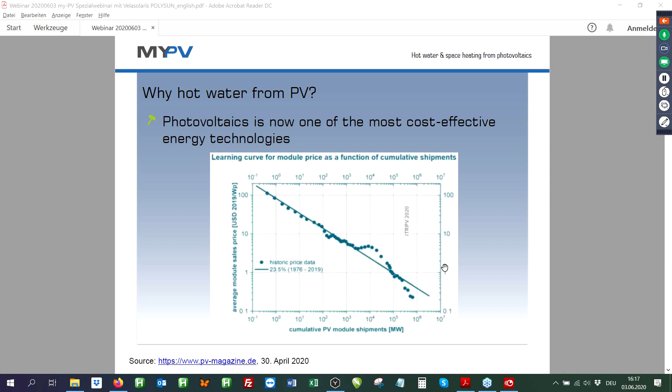What else? It's all about saving energy, storing energy, especially excess energy that would be fed into the grid. And here we are mainly talking about battery systems. They are all over the media. But for a single family home, a typical battery size means a storage capacity of, let's say, 5 kilowatt hours to 10 kilowatt hours. And this is quite a small capacity that has to be bought for much money.

As a cheaper alternative, we can use the excess power for hot water heating. For example, in a hot water tank with a volume of 300 liters, we have a much higher storage capacity.

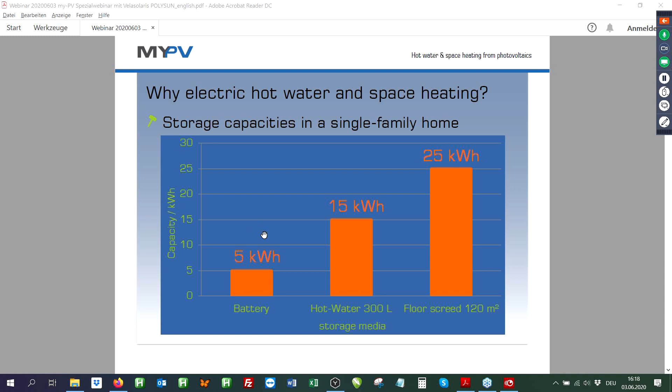So we can be a cheap alternative to batteries, but we do not compete with batteries at my-PV. We have a lot of very successful partnerships with battery manufacturers. And for this case, it is very important to know that if there is a battery in the system, the battery should have priority when you charge it. Because once you have done power to heat, and it is heat in the boiler, we cannot get electricity back out of it. That is clear, and that's why priority for the charging should be on the battery if there is a battery.

This is a rough overview of our portfolio, and today I would like to show you 3 models in POLYSUN. And I want to start with ELWA. As I mentioned, it is the only DC solution that we have at MyPV. It was our first product. It was invented in 2014. And still up to date, there have been hardly any changes on the device. The only problem that ELWA had was that this solution was definitely ahead of its time. But nowadays, this kind of application got into the people's minds, into the people's hearts, and it has become one of our flagships at MyPV.

And the principle is really the same as for a solar thermal system. We use all the energy from the roof, and we are using it for heat production in the boiler or in the storage tank. This does not matter. There is no inverter in between. All the PV power is used by this immersion heater. To ensure that this works efficiently, this power output, and this is the key know-how at MyPV, this power output of the heater is linearly power controlled. It can adjust its power output from 0 watts to 2000 watts. And above all, there's an MPP tracker integrated in the solution.

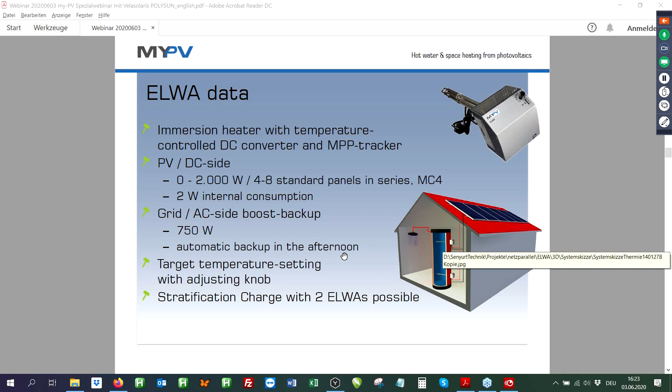And before we are seeing how we created the model in POLYSUN, here are a few more technical details. I already mentioned most of them. One special thing that is possible with ELWA, you can use two heaters in parallel on one and the same panel string, and you can adjust a lower priority for the heater on the bottom. And in doing so, you can ensure, even in very huge storage tanks, to have comfort, to have the required hot water temperature at the top very soon, and the rest of the energy can be used by the ELWA at the bottom. Practically speaking, it is also possible to use them in two separate boilers or tanks, no problem from my side. And enough of the technical details. We are now talking about the ELWA model in POLYSUN.

Andreas already mentioned it. There are a lot of different controllers available in POLYSUN, and the one that we are using is my favorite one. It's the programmable controller, because here all the logic, all the control strategies are in our hand. So with just this simple formula here, we can do the modeling of ELWA.

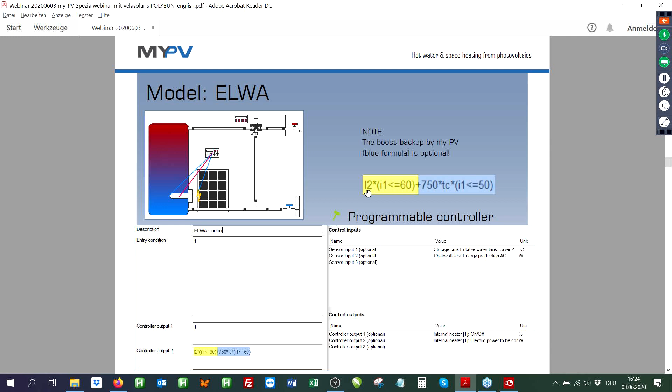And there are two main parts, the yellow highlighted one and the blue highlighted one. And only the yellow highlighted one is required to create a model which uses DC power for heating. I would like to show you this directly in POLYSUN. So there is a standard brick of the PV panel. So this also has an inverter here, but I choose to hide it.

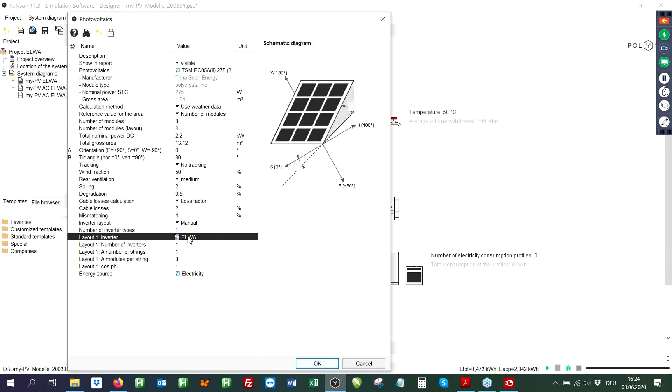Nevertheless, there is an inverter in this model, but this is our own defined inverter, which describes the properties of ELWA, basically the DC input voltage from 100 to 360 volts. So it's not a standard inverter that we are using, because on the real product there is no inverter. So I'm using a 300-liter tank in this model.

Of course, these components and the logic of this programmable controller can be used for every other tank that you want. You can also take our formula out of this controller and use it in another model that you are working on, no problem. But now let's see how the formula works.

It's really very easy. So the first part means: take all the power which is received from the PV panels and give this power to the immersion heater as long as the temperature in the tank is below 60 degrees centigrade. So this value here actually means the setting of the rotation knob. You remember the rotation knob here on ELWA.

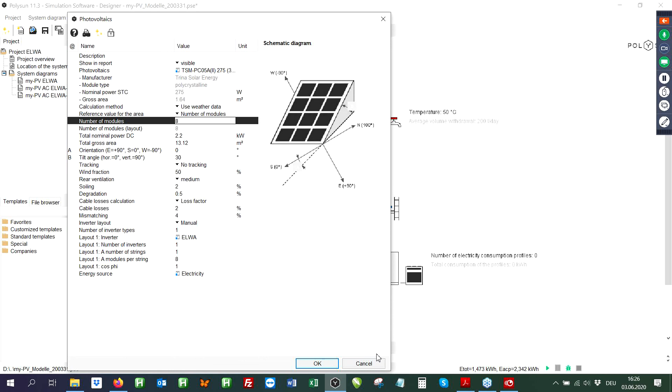Depending on the position of this rotation knob, we are setting this value here, and that's it. As long as it is not above 60 degrees centigrade, use all the PV power for heating. And this is it, no big deal. And I have adjusted 8 panels here, and this is how the system works.

In this model there is no other conventional backup heat source, and that's why I also use this optional backup with the mains plug, and I'm doing this with the second part of the formula, which means from 3 p.m. in the afternoon forward, use 750 watts as long as the temperature in the boiler is below 50 degrees centigrade.

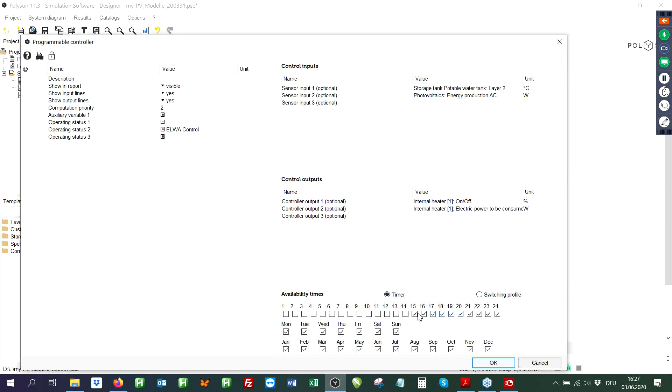Why 50? This is a factory preset from my-PV for the optional AC backup. You can change this with an infrared interface, but I would not go any further on the description of this. The factory preset is 50 degrees centigrade. And the AC backup starts in the afternoon, which actually can also be changed on the real product.

Now let's see what POLYSUN tells us about the performance. Please note I have electric consumers in here, but there is no profile in the background. This is just to get the results also for the electric consumers. So let's start the simulation for the first time, and POLYSUN is calculating. Very nice. And the two most important things to me can be found at electric consumers.

This is the degree of self-sufficiency, and usually this part describes how much electric energy for your building can be provided by the PV system. This works for all the AC models, but actually for the ELWA model this means a different thing.

This means the so-called solar coverage ratio, which means how much of my energy demand for hot water heating can be provided by the sun. The word is another one, but the definition and the value are still valid. So

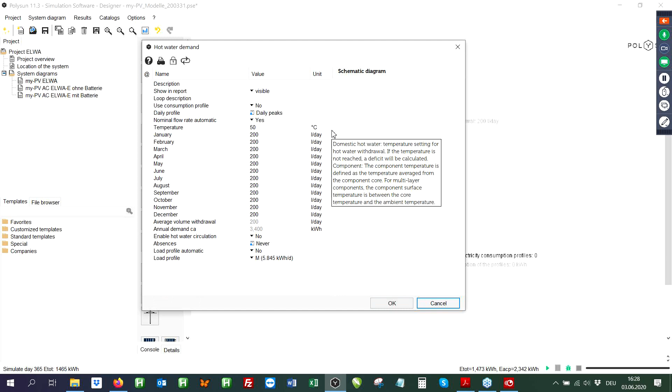54% of the annual energy demand for hot water heating can be provided by 8 panels, and the hot water demand that has been defined is the demand of 4 persons. So we are talking about a single family home here, and more than half of the energy can be provided by 8 PV panels.

And what else? The self-consumption fraction, which means how much energy can be used from the PV system directly in the building. So technically speaking, there is no way to feed into the power grid, but the POLYSUN model does not know. And what we are seeing here, the rest of 11.5%, is the energy from the PV panels that cannot be used for anything.

Why is that? Because during summertime we are on target temperature in the hot water boiler, and then the ELWA has to shut down, and then the PV power is not used for anything. But this is without all those disadvantages that we see during summertime on solar thermal systems.

But because of course there is no stagnation, there is no evaporation in a PV panel. It does not harm a PV panel at all when you create a short circuit on the... What is the English word for short circuit? I'm sorry, I missed it, but you know what I mean. You can connect plus to minus directly, and this does not harm the panel.

So a lot of advantages, and we are asked quite often, what happens to this rest of the energy? I cannot use it. Actually, you do not have to use it. This very little part that cannot be used for anything is so small, it would not be worth to spend money on an inverter for that. Yeah, so this is not the big deal here. So just less than 300 kilowatt hours a year cannot be used.

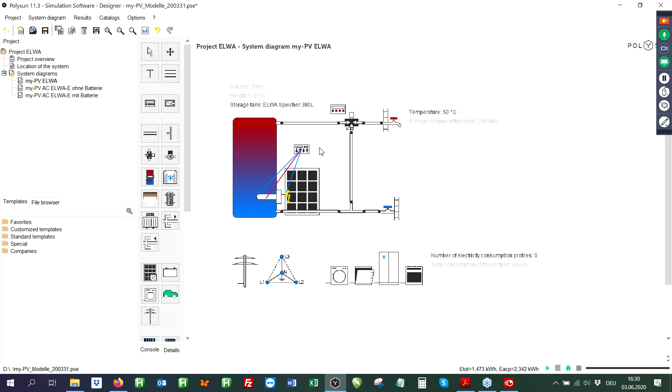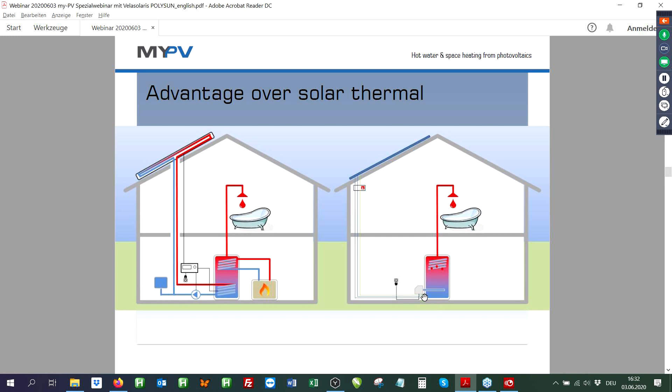So wires instead of pipes is one of our slogans, and PV power has become so cheap. We can also make it many times easier. Not only many times easier technically speaking, nowadays we are also making the system cheaper, and that's the key fact. It's so cheap we can think about using PV power even for heating.

And I would say this is quite a good time for our first break, Andreas, because this is the only DC product that I'm going to introduce today, the only DC solution we have. And before we start looking at the AC solution, maybe we should take a look on the questions, if there are already some questions. Yes. One question is regarding the maximum DC power input which would be suitable for ELWA.

What really matters is the DC input voltage. It has to be within a range of 100 to 360 volts. And it's no problem when you overpower ELWA with more than 2 kilowatt peak. You can also use more panels or more powerful panels, let's say a 330 watt peak panel, and you're using 8 of them serial. This is no problem as long as you are below this maximum input voltage. Why is that not a problem? Because ELWA is able to limit the current by itself. The current is always limited to 10 amps. The only danger for the product is a too high input voltage.

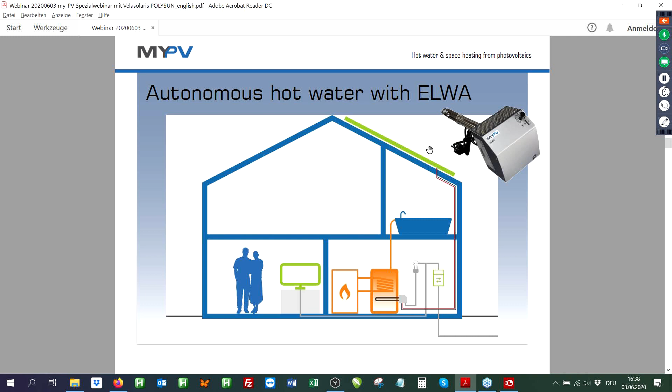And even on cold days, the PV system works more efficiently, while solar thermal system efficiency decreases. And one of my favorites is that also on cloudy days with low or without any direct sun radiation, this system operates and provides hot water, while a solar thermal system on the same day would not do anything. So this is one of the greatest technical features when we compare those systems.

Okay. Well, regarding the payback time and all this, maybe we will really reply by email, because obviously we need to do a comparison. Or maybe you want to say something about that as well. But in any case, I would say that we could do that later.

One very simple question, which goes in the commercial direction: is the product available in North America? Not yet, unfortunately. We can send it to North America, but we do not have the certifications for North America so far. And it's not due to the fact that North America has a 60 Hertz power grid. The ELWA would be able to work even in 60 Hertz power grids, as would the AC backup. This is a question of permission and certification, but we have not taken the step to North America so far. Unfortunately, I'm sorry.

Okay. So thank you for these explanations. I would suggest that we then proceed with the AC systems. Very well. So we are talking about on-grid systems now. These systems usually have more than just 8 panels. I'm talking about 5, 8, 10, or 20 kilowatt peak systems, whatever, it does not matter. And of course there is an inverter. The AC power from the inverter usually supplies the electric appliances in the building with priority. So the light, the devices, and so on.

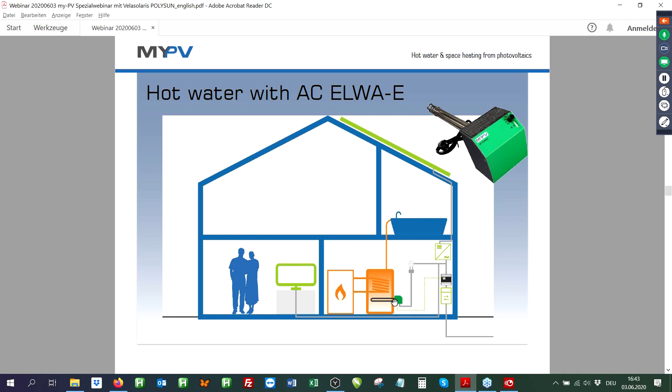The dimensions of the heater are exactly the same as for the DC solution. So this cover here is quite small, I have not mentioned that before. It's approximately 13 times 15 centimeters, and the heating elements are 45 centimeters long, 1.5 inch standard connection thread. And for the excess power detection, there's the power meter from my-PV as an accessory part. And here we also have the technical data on AC ELWA-E.

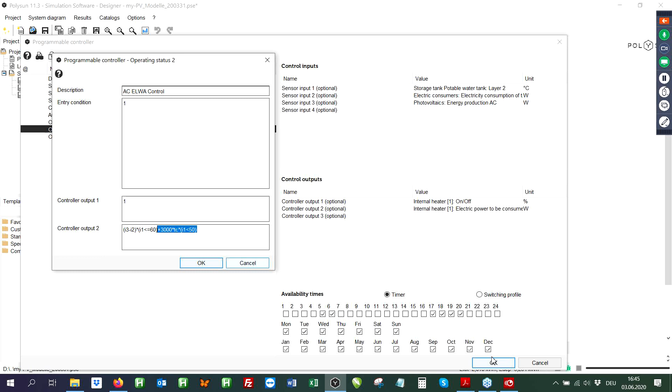But this is also only activated during time frames, set on the web interface of the heater. You know, it is connected to the router, and of course you have Ethernet access to the heater. And on this web interface you can adjust 2 time frames for AC backup. And again, if you do not want to use the AC backup, just remove this part of the formula. And this is, by the way, the factory preset. So when you take AC ELWA-E out of the box, it only uses excess energy and not the backup part. I'm keeping this backup part now in the formula to show what happens.

The brick of the PV is now a little bigger. I have adjusted a 5 kilowatt peak system in this model, and of course there is now also a profile of the electric appliances. This is a difference to the ELWA system. There was no consumption of the electric appliances. Now we are on the grid. We have to use power from the PV for the electric appliances with priority, and just want to take the energy that would be fed into the grid. So let's take a look at the results.

And I like this detailed view of the component results so much, because POLYSUN allows to copy all those results, and you can use it for Microsoft Excel or whatever. This is really a great thing here.

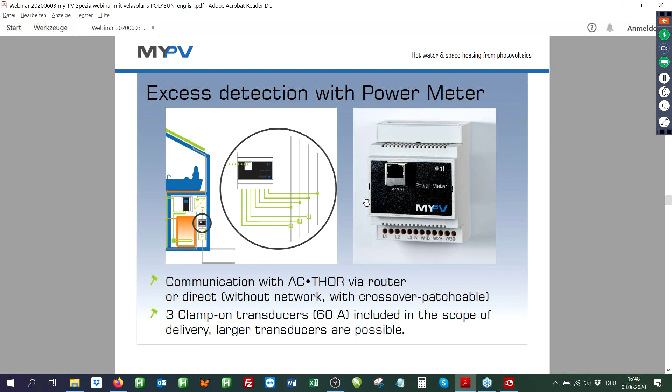And this can be a cheap alternative to battery systems, of course, but we do not compete with batteries, and that's why we are talking about compatibility now. I already mentioned there is a huge number of inverter manufacturers, battery manufacturers and smart home systems who are already able to control the AC ELWA-E. And if you have one of those signal sources available, it's not necessary to use the MyPV power meter. It's not necessary to use our accessory part then, because the excess power information is provided by one of those.

And let's keep a few more minutes on the topic of self-consumption. There is this diagram from the Technical University in Berlin. For a single family home, this diagram shows a self-consumption ratio of 30%, while we are talking about a self-consumption ratio of 2/3, 66%, when we are installing a battery. And power to heat with a MyPV solution can raise the self-consumption ratio even higher to 80%, for example.

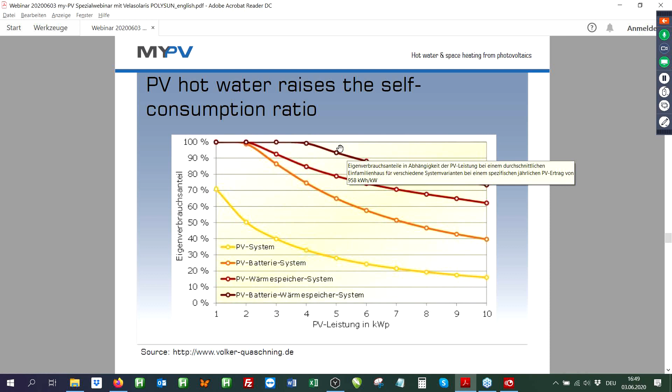And if you combine both technologies together, we have on average a self-consumption ratio of more than 90% in this example. And this is what we are talking about now. If there is a battery, the battery should have priority, because once it is heat in the hot water boiler, you cannot get electricity back out of it. That's clear. So power to heat is always the last application before you feed into the power grid.

Then the formula has a green part, and this green part also considers the state of charge of the battery, which means that only if the state of charge of the battery is higher than 98%, then we would use excess power for heating, and we will not start earlier.

And one very important thing, if you use this blue part, this optional AC backup, you will lose all the advantages of the battery. Why is that? Because in the evening, when there was not enough PV power available to do the hot water heating, and the optional boost backup starts, AC ELWA-E will take the energy from the battery, which means you're just moving energy from the green area to the red area, which immediately destroys all the battery advantages.

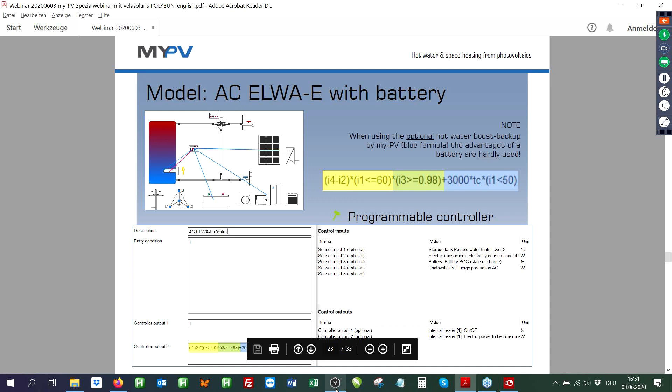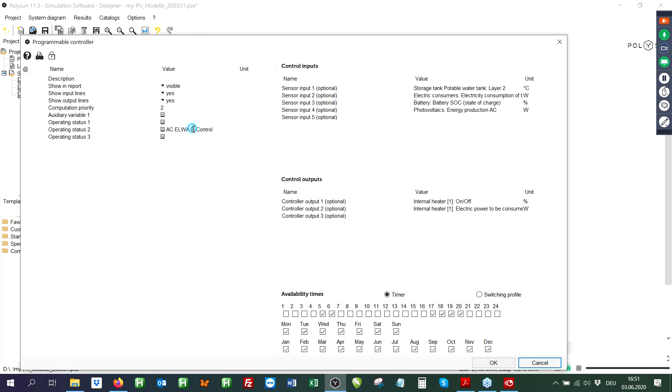Nevertheless, it's up to you, up to the planners, how you use those systems. You have these components available. You have the models available at POLYSUN. And here we have now also the battery, and the state of charge of the battery is considered here. For my hydraulic model, there is no thermal backup source. So that's why I'm still using this formula part of the optional boost backup. Otherwise we would have an error message that there is not enough hot water.

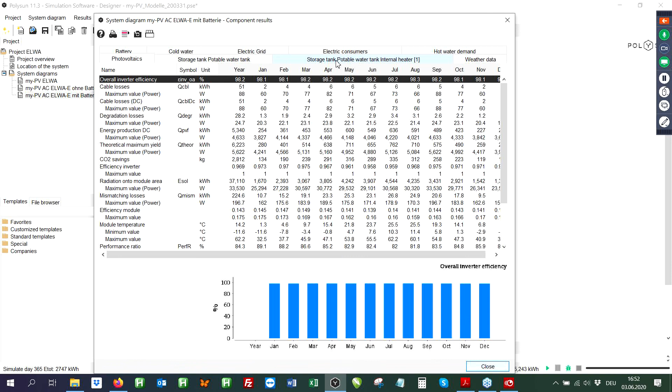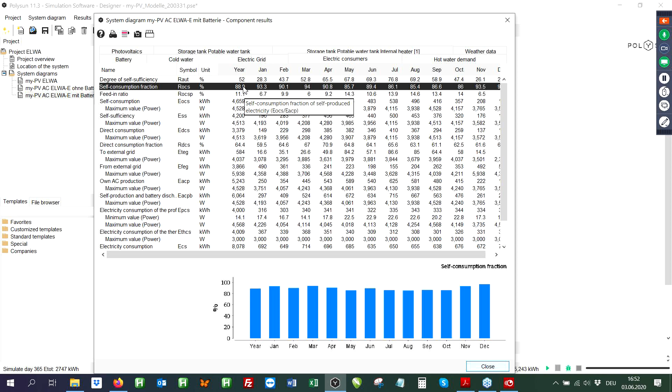But I want to show you what is possible when we combine both technologies together. And here we see a maximum self-consumption ratio for electric consumers of nearly 90% in this example. So from my point of view, power to heat is a key part for the transition to renewable energies, even when there is a battery in the system.

Because let's imagine in a few years when I'm looking out of my window and I see my neighborhood, all of the buildings, or hopefully most of them, will have a PV system on the roof, and most of those PV systems will be equipped with a battery as well. But what happens at 11 a.m. when all the batteries are fully charged? I would like to tell you the grid operator will shut down the PV systems. That's a fact, because he has to do so. He has to save his power grid.

The power grid is not able to transport all of this excess energy from all those PV systems. So the PV system has to shut down. I can understand this from a technical perspective, but it is an absolute disaster for the transition to renewable energies. Because what happens in the evening when we need hot water for showering?

Are we starting our gas boiler then, or what are we going to do? Or will we be clever enough to use this excess power for power to heat applications? These are some deeper thoughts at this point, which are very important to me. And we have now finished all the three models.

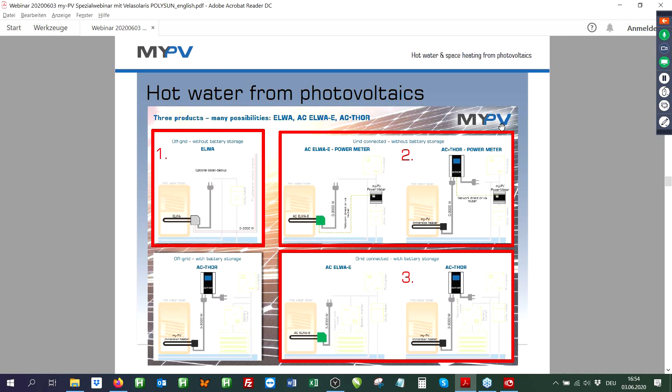Then we can use another product, and this is the AC THOR. The AC THOR is not a smart home system; with this color touch display, many people are reminded of a smart home system, but it's not. It's an AC power controller, and with this AC power controller you can make a standard electric heater PV ready in terms of linear power control.

So imagine the green AC ELWA-E, but instead of the immersion heater we have a mains socket on the device, and this is available in a single phase variant for a power control of 0 to 3 kilowatts maximum. But it is also available as a 3-phase variant with a maximum power output of 9 kilowatts. So it's very compact. A 9 kilowatt power controller that is so small is really very unique on the market.

And by the way, there are a lot of unique sales points for this product. One of them is the size. Another one is the color touch display. The third one is the communication. We are open for third-party control, and I give the communication protocol of this interface to everyone who wants to work with the device. Of course, the excess power information can also be detected by the my-PV power meter.

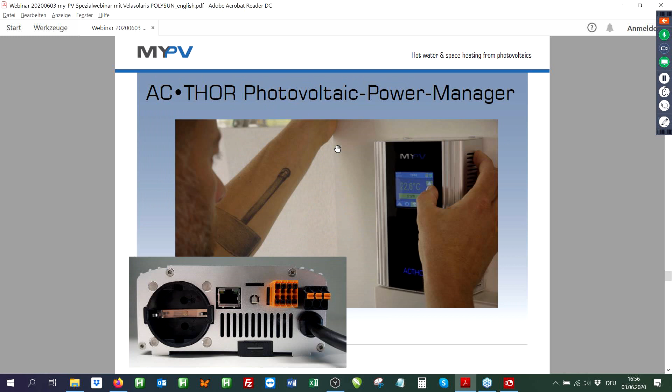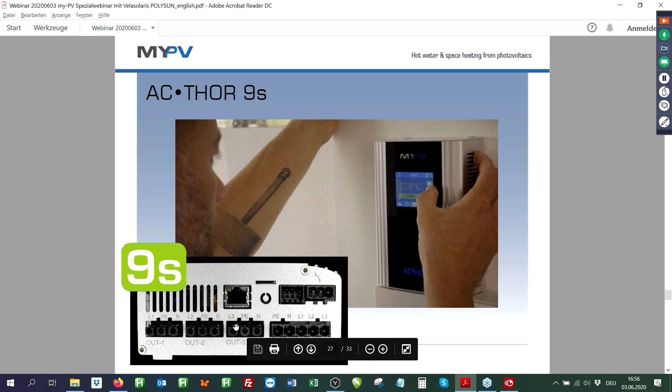So we have the same compatibility options as for the AC ELWA-E, and here are most of them. Inverter manufacturers, battery manufacturers, and smart home systems can also control the AC THOR in the single phase and in the three-phase variant. What else is great on the AC THOR 9s, as we call the 9 kilowatt version? All three outputs are controllable. Not at the same time, but we can do the linear power control either on output 1, output 2 or output 3, and altogether the maximum power output is 9,000 watts.

What else? The kind of power control that we are using in all our products is the same power control as used by PV inverters. We do not use thyristors. We do not have the so-called phase angle control, which is very important for the grid operators, not only in Switzerland but also in Austria and Germany. This topic becomes more and more important, and with a my-PV product you can rely on a high quality solution. So it works as a PV inverter.

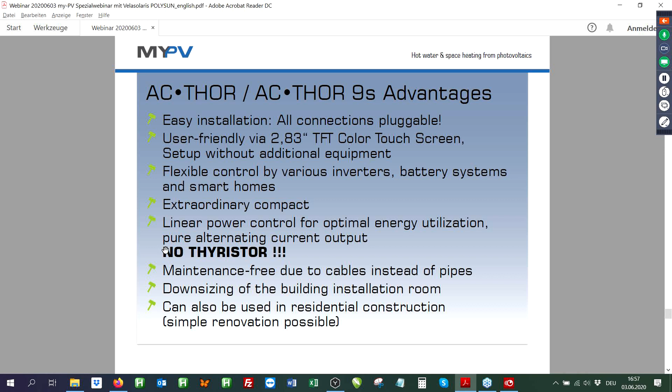Where to buy? On our website you can find the information on our distributors and wholesalers worldwide. As a manufacturer, we are not selling to private persons, but we have a very well developed distribution network in many countries. Detailed information is of course available anytime in the download section on our website. Not only the manuals and wiring diagrams, but also the recordings of webinars that we have done, and a few of them are also available in English. So my recommendation, if you want to go into more detail, just check the my-PV website.

And of course, another way to get information is YouTube. So far, unfortunately, most of the videos are only online in German, but YouTube offers quite good subtitle translation, which can be activated easily for each video. So please also take a look at that.

And looking at my clock now, we are just on time. Andreas, are there still questions? Yes, well, there are more questions, and one question I will answer directly.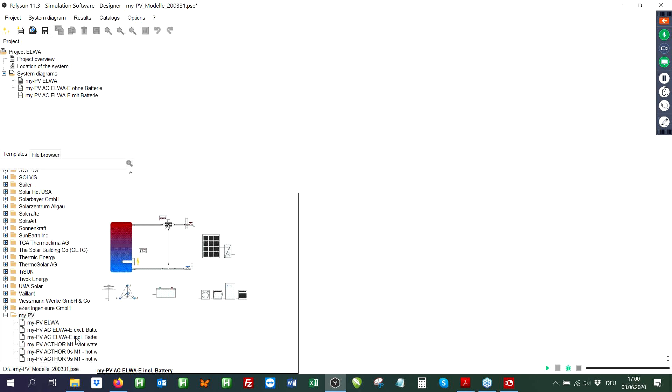But of course it depends also upon the system, upon the situation, upon the consumption. As you know, in POLYSUN you have the possibility to compare solar thermal systems with PV systems, so you can define both of your systems and then go into the menu results, define the economic conditions for both systems, and then go to the comparison of the profitability calculation.

Okay. Yes, Andreas, you also promised to do it by yourself too. Sorry, I do not want to interrupt you. No, please. We already talked about creating the alphabetical order for my-PV, because I'm afraid it's hard to find our models here at the bottom, and I'm looking forward to it. I absolutely agree. And probably this is because of the small letter M, because you see eZeit is also starting. No. Well, of course, it's also the Z, but it's at the end of the list. No problem.

Anyway, for everybody who is following this webinar, you can find my-PV at the bottom of the list, last but not least. I really want to underline it, last but not least. No problem, Andreas. Thank you very much.

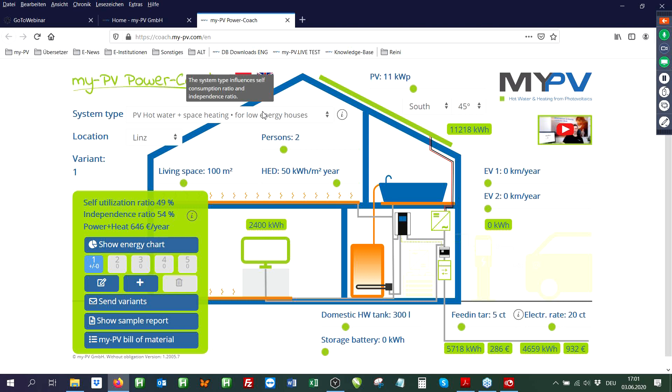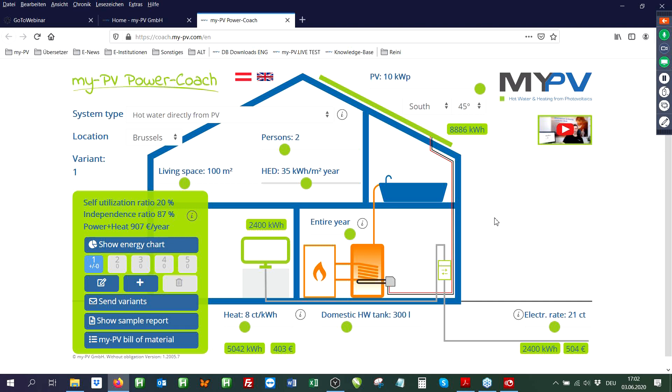Maybe a few words from my side on the profitability comparison. What I'm going to show you now is a small online tool. It's light years away from the dynamic annual simulation program of POLYSUN. This is just to inform yourself roughly; you can choose a location, and you can set electricity rates and energy demand here for a very rough, quick overview. Andreas, this is light years away from the tool that you have created. I hope you are not afraid that I'm trying to compete with you at this point. Definitely not.

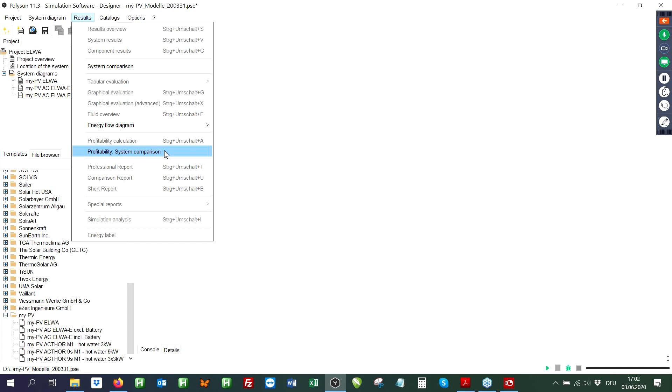One person was asking if you can quickly show an example of such a comparison, the profitability calculation. You have to prepare both systems first among your system diagrams. Maybe, Reinhard, you can quickly show in POLYSUN the results menu. Okay. There you see you have the profitability calculation, which you do first. So first you define all your conditions, your prices, your investment costs for each system in profitability calculation.

This will be highlighted once you select a system diagram, and when you have set your values for both systems which you want to compare, or for all 3 or 4 systems, then you have to set one system as a reference system, which you do by clicking on the system diagram with the right mouse button and highlighting it as reference system. When you have finished that, you go on to profitability system comparison, and you will see the results.